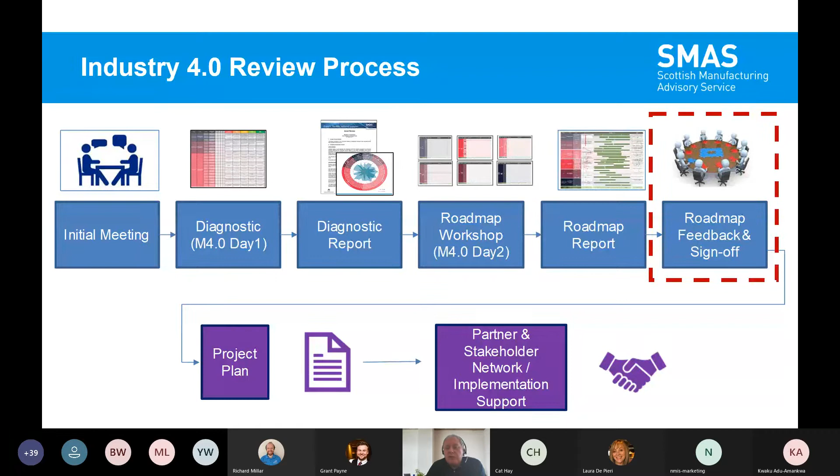So as I say, day 1 diagnostic, day 2 road mapping session, and ultimately we get to the end of that process. We'll follow up with you a couple of weeks later, quickly review the roadmap and have some kind of agreement in terms of what comes next and what the actions are. Those actions can be company specific that they'll take on themselves, or it can be through partners and networks.

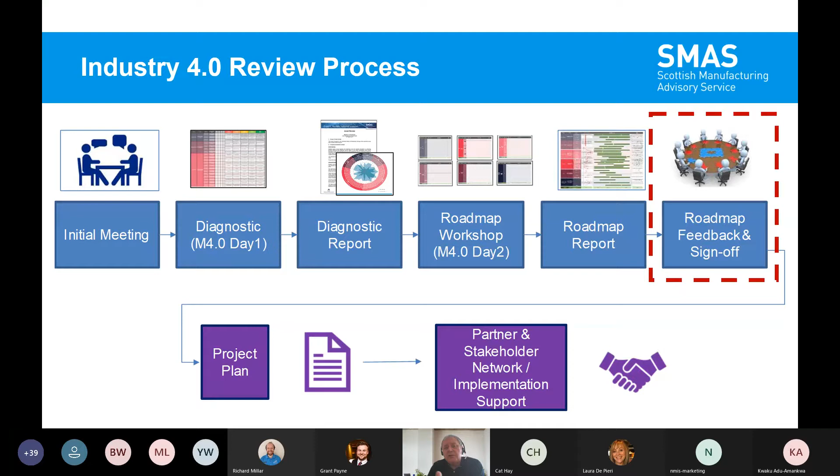Having been involved in a good number of these - SMAS has done in the region of about 200 now as a minimum - we feel companies will have a better understanding of how Industry 4 technologies can impact their business. It also helps dispel some of the myths around Industry 4, like it's really expensive, or it's overcomplicated, and you must deploy everything. I think that's one of the benefits of undertaking this process - it really puts some of these to bed, that that's not necessarily the case.

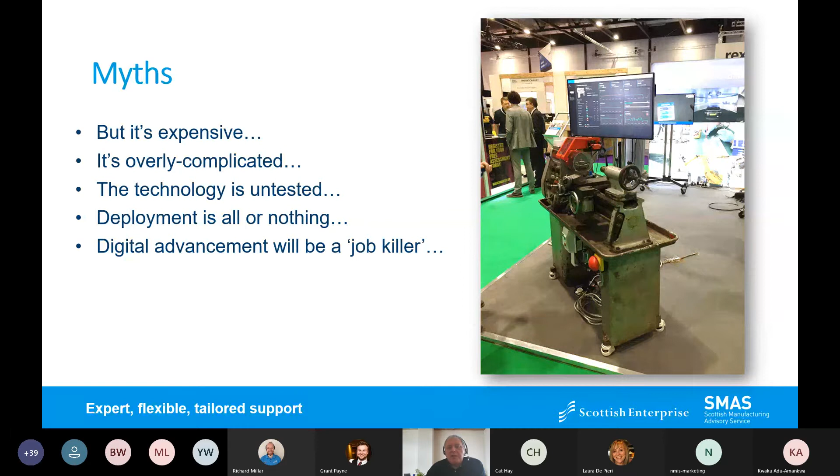It might be SMAS coming back in for maybe an introduction to lean or some SMED changeover reduction. It might be our digital transformations team coming back in to give you some impartial advisory support on implementing, say, ERP systems, or finding out more about best practice happening in the marketplace. We may signpost you towards some of our partners in Scottish Enterprise, such as sustainability or workplace innovation.

But certainly more and more, we are seeing a real drive towards some of our external partners in the Industry 4 arena, such as Data Lab, NMIS, who are on the call today, and CENSIS, for example, with sensors and imaging. And I think it's an exciting time for Scotland, for companies looking to embark on their digital journey.

And as I've tried to highlight there, folks, for me, it's not just about the technology itself, but it's a range of support. And that can be skills and education, it can be infrastructure or collaboration on research, or in many cases, it can be funding through innovation and such like.

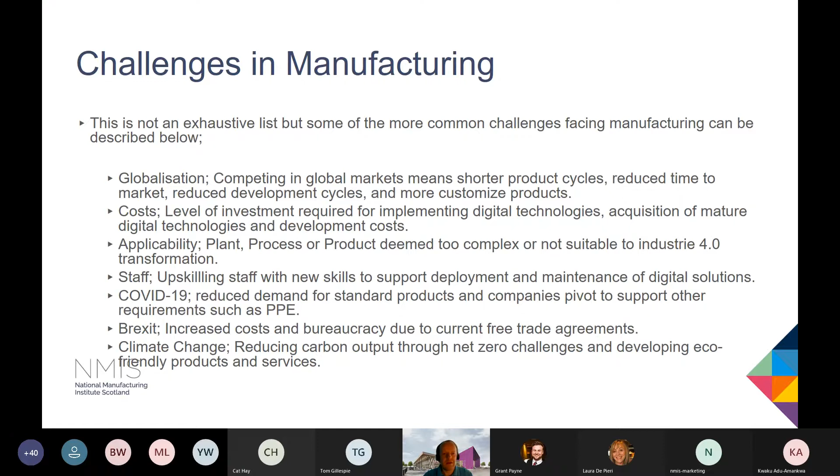Industry 4, also known as a cyber-physical system? It's the fusion of virtual, digital, and physical worlds. A cyber-physical system, which is something that is underpinning of Industry 4 themes, is about how do we manage and maintain a system through a network of connected devices that is able to continuously operate by adapting

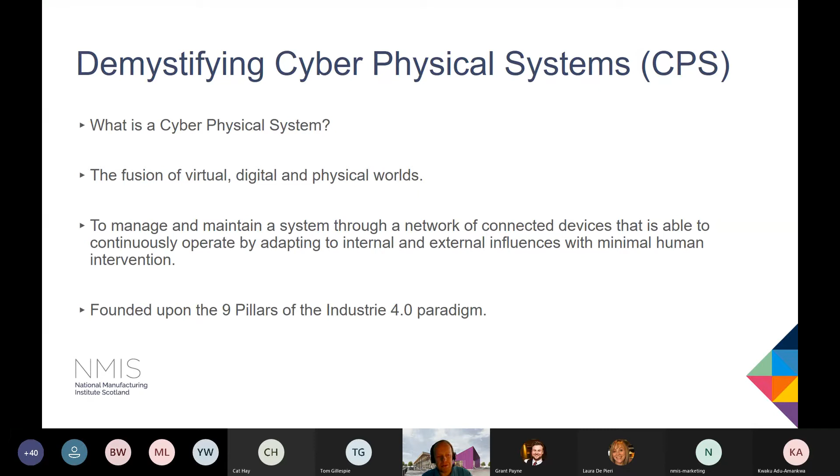to internal and external influences with minimal human intervention. And this kind of theory came out of Germany back in 2009, and it really kind of founded the 9 pillars of Industry 4, as it were.

We're starting to develop architectural solutions around building information modelling. There's some new concepts coming out through product design called model-based definition and model-based enterprise, and how we can apply those digital characteristics from a model into the manufacturing process.

We have control systems, so control systems that operate automated machinery already. So when we saw in the advent of Industry 3 with more automation and robotics being implemented into industry, that we are controlling these systems through PLCs and SCADA systems, for example.

And then what we're doing is we're creating all this already. This already exists, and we're creating and we're managing it through product lifecycle management tool sets, product data management tool sets. We're controlling the business through enterprise resource planning.

So what can we do with that adds a little bit more content to Industry 4? So we can create digital standard operating procedures from the base, the original design intent.

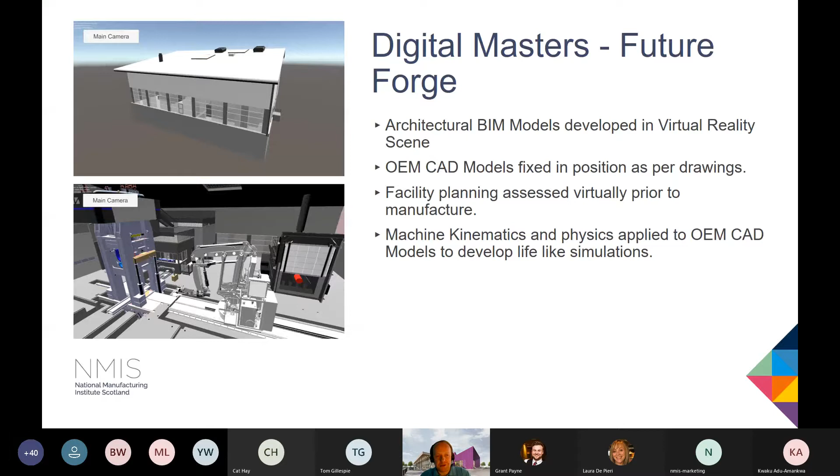The next phase we've just completed is looking at the machine kinematics and the physics of those machines based on materials, weights, etc., and the operations of the equipment, really looking at how we could provide a lifelike simulation into that facility to give much greater context to the person working in there within that VR content.

We can see we've got different views within the VR scene where training and operation requirements are being done. We're starting to train based on what the commissioned system actually looks like now, using a method of hardware in the loop, where we connect the physical joystick that's going to be in the control center for the trainer to operate the robotic arm in the VR cave that we have. So we're really trying to integrate physical hardware into a virtual scene to enable that training and development.

That's where we are with the Future Forge. The expectation is that it's going to finish commissioning at the tail end of this year, with first operational trials going live next year. Obviously COVID's had a bit of an impact on the actual development, implementation and commissioning of the system.

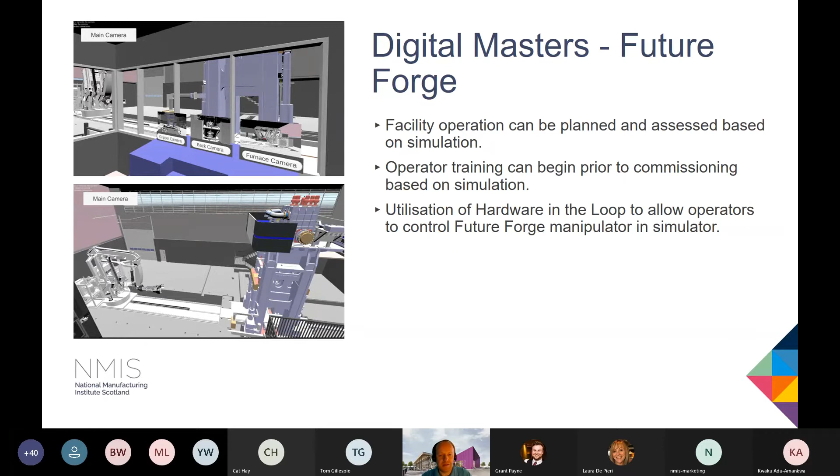The challenge was to look at how we could remove inconsistent filling processes. We had to make sure we were removing overspill, underfill and foaming by looking at real-time data on the fill volume and also looking at how the process works in much more depth. I'm just going to show you the next slide in a bit more detail on that.

So the key requirements: accurate and repeatable fill. We want to minimize the air pocket at the top of the barrel. No overfill - obviously overfill is a big issue with tax requirements for filling whisky into the barrels. No flexible hoses were to be utilised at all, and it had to be easy to use. The target fill time for an ASB barrel, an American Standard barrel of about 200 litres, is 60 seconds, and it had to be suitable for an ATEX environment.

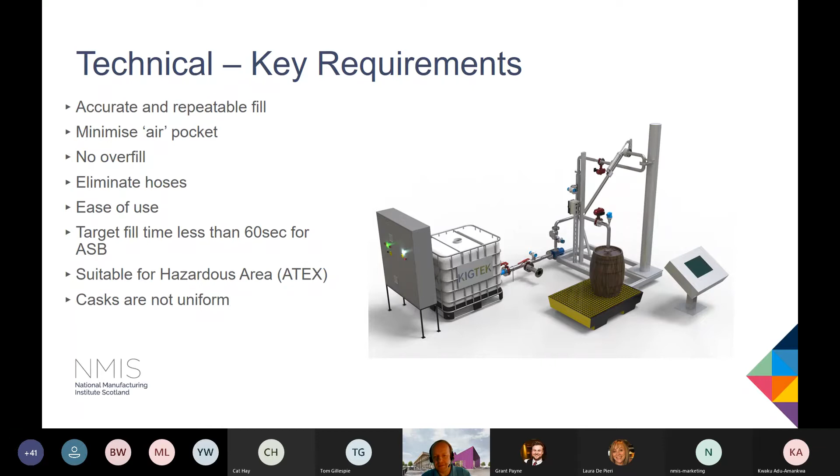The other thing that's really important to add here is that the casks are not uniform. Every cask is stripped down, rebuilt, charred - it's all handmade. Any new cask that's provided doesn't come as a cask; it comes as separate individual components, then it's assembled within the cooperage. So every volume inside that barrel is inherently different. What we wanted to do within this project was look at how we could remove that inconsistency within the process. You can see on the right-hand side here what our final product design, the test rig we built within our factory, looks like.

Well, on the left-hand side, we have the physical world. What is the actual machine, as it were? What is the test rig? What is the production system?

So we start at the bottom with the plant or machine. We have actuators and sensors that can control the process and the physical devices. We have remote I/O servers and control devices that connect to our physical assets and actuators and sensors to control the process. And then that remote I/O layer goes back into the automation system, which is the PLC. And the PLC is operated by the operating system, which is PCS7. And then what we're doing is we're sending all the data into the cloud, into a database to record all that.

But in our digital world, we can see we've got some different elements in here. So at the bottom, we're really looking at how we simulate the plant behavior. So we used a package called AMESIM, which helped us to understand the hydraulic flow of the fluid going through the actual mechanical design of the physical test rig.

So we're using that to understand quite exactly, with regards to the pipe runs and pipe bends, what the fluid process is doing, i.e. what the speed is, what the pressure is, what the pressure drop is across the control valves and the flow control valves. So we really are getting an in-depth knowledge of the process before we even started doing anything.

And then we're using a sort of integrated package here that allows us to connect the CFD, the hydraulic analysis, into a platform called SIMIT, which is a simulation of the drives and the signals that the actuators and the sensors will look at within the physical system. So what we really are creating here is a digital entity of our physical assets that control the process.

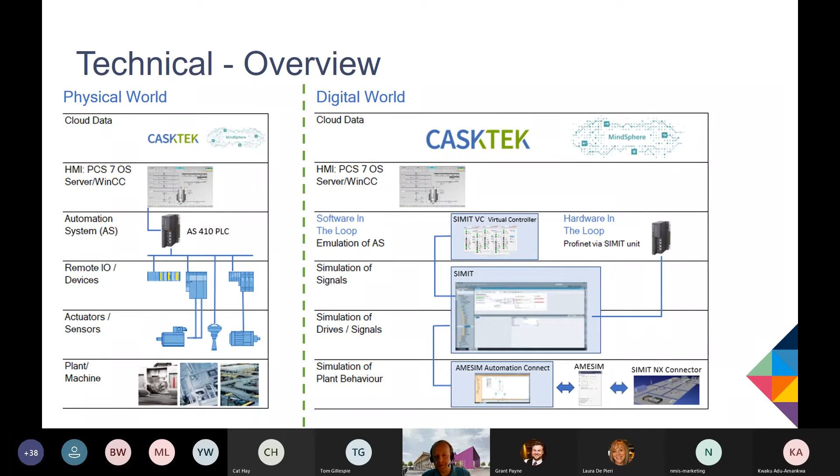The results from that process, we were able to achieve a 5% improvement on industry standards with better than 99% fill on a 200 litre cask. We reduced the cask fill cycle time by 33%. So we went from approximately 60 seconds down to 40 seconds. There was no underfilling, there was no overfilling. So it was a highly repeatable, highly accurate process. And the impact of that is that there's potential to save the whisky industry millions of pounds each year in logistics, warehousing and inventory costs.

When you think about a 5% improvement on industry standards, so we're going from 94% to 99%, that works out about 12 litres per cask. When you have approximately 8 million casks across the site of a big plant like Diageo, you're looking at about 96 million litres of whisky. And the other major impact we have is we've provided a new product and service offering for Kigtek, the SME. They've now got a solution that allows them to challenge other industry areas that they've not had the exposure to already.

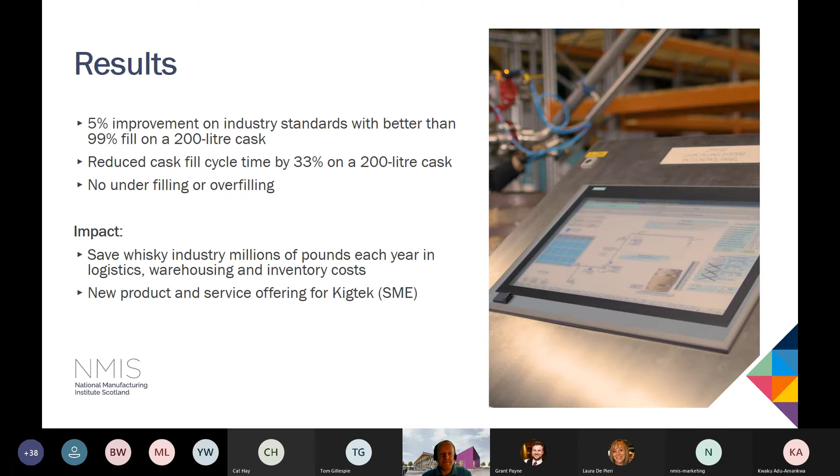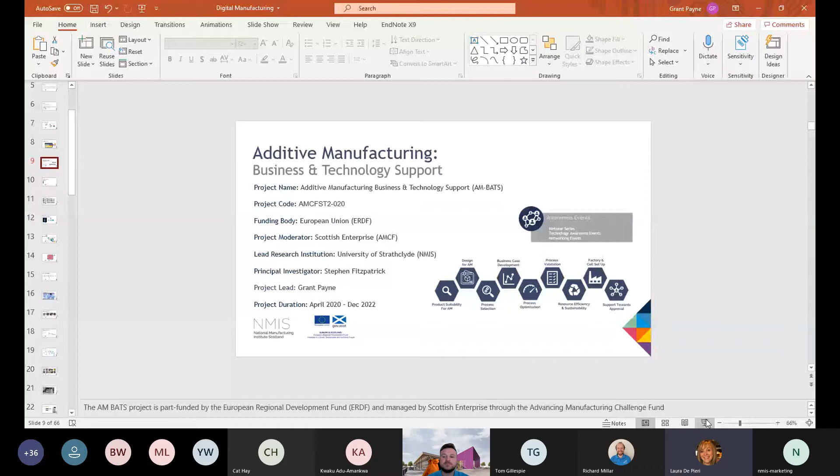Sorry, apologies about that. Thank you very much, Laura, for bringing that to my attention. Yes, so Stephen Fitzpatrick, who unfortunately can't be here today, is principal investigator on that, and I'm the project lead, and this project's running until December 2022.

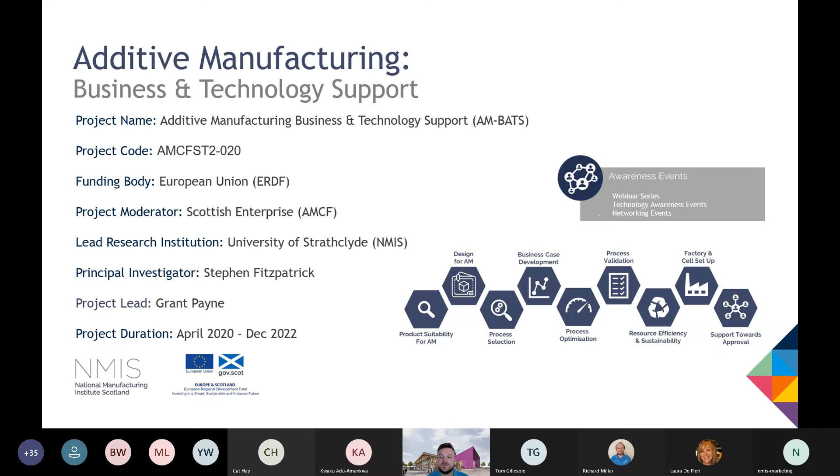So the project is aimed at SMEs located in Scotland. So we have three criteria: located in Scotland, SME, and the adherence to horizontal themes. And if you follow this little web link here, you can find out more information about that.

Just briefly looking at what we are offering within this project, there's a number of different support packages ranging from product suitability through to factory cell setup and process validation. But these are just a kind of overview to show you an idea of some of the things that we can help you with. But if you've got some challenges with additive manufacturing, my contact details will be there at the end, and please get in touch and we can discuss how we could work together.

So how are we applying this in additive manufacturing, the use of Industry 4.0? So just very simply looking at a kind of standard manufacturing process, going from design to manufacture to use. We're drawing down on a database of information to inform how each of these steps happen. And this is very traditional and how we've been working for many years.

But as Richard went into great detail explaining there about feedback, what we're now looking at is the information coming out the back end of design, so FE simulations, manufacturing, so process monitoring, and use, again, monitoring systems when parts and products are being used. And then we use this for continuous improvement as a feedback loop.

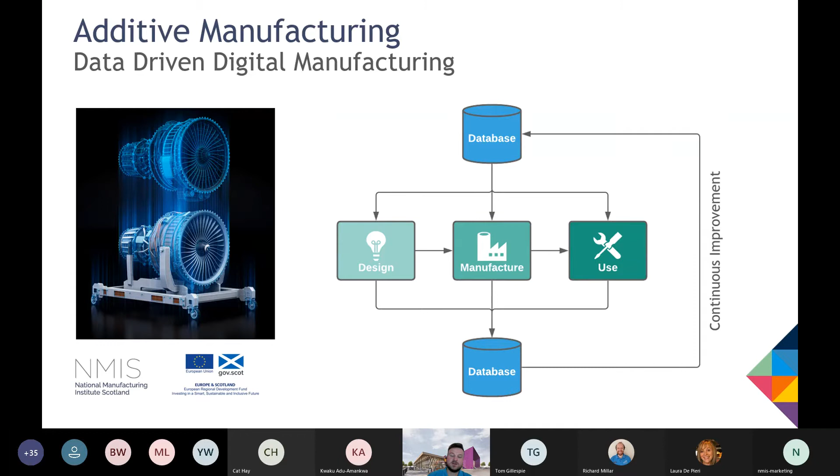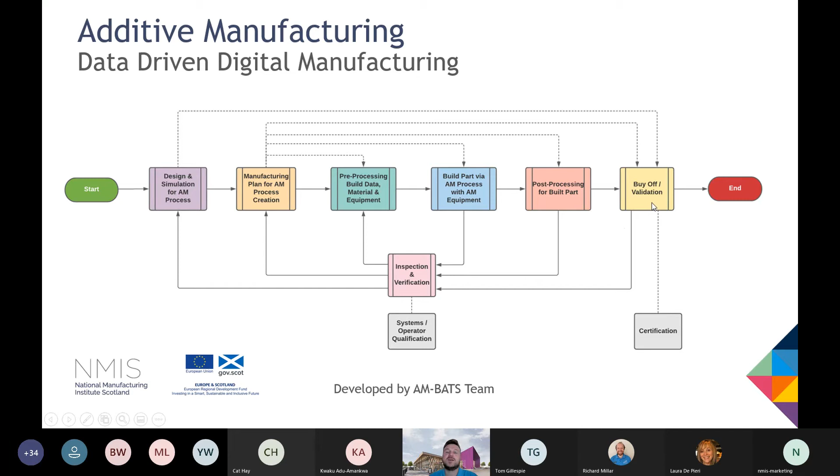When we're looking at the additive manufacturing process, we've categorized it into these six main components: design and simulation, manufacturing planning, pre-processing, the actual manufacture itself, post-processing, and then buy-off and validation. Now you can see that we've got a loop system going on here in terms of inspection and verification, and you can imagine that all the data generated from this then leads up into how you get parts certified at the far end of the scale.

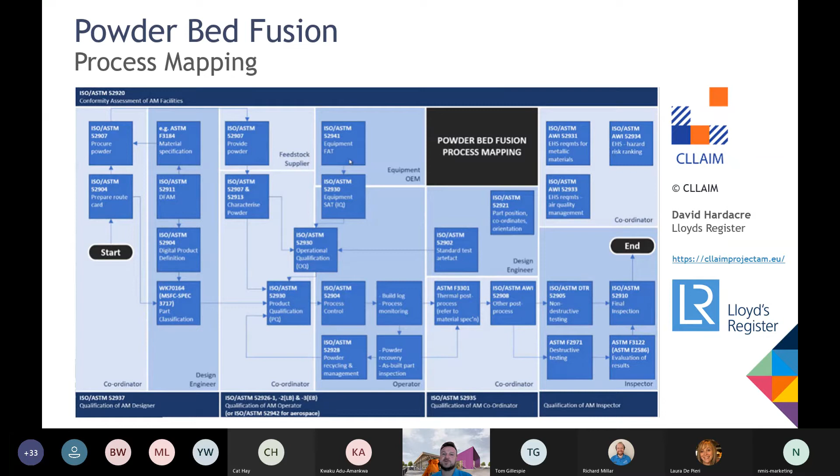David Hardacre from Lloyd's Register has done a really good diagram to summarize this as part of the CLLAIM project, looking at powder bed fusion process mapping. You can see various different points along the way where all this data is being created, such as powder characterization—the material that you're pulling into the system—process monitoring, and all your destructive and non-destructive testing. Once pulled together, this is the pathway for having these parts certified, because without this data, it's impossible to have these parts certified—you don't have the information to do that.

So I'm going to do a quick case study here, looking at a project we worked on called DigiTool a couple of years ago, just looking at that process we're talking about—from design to manufacture to being used to its end of life.

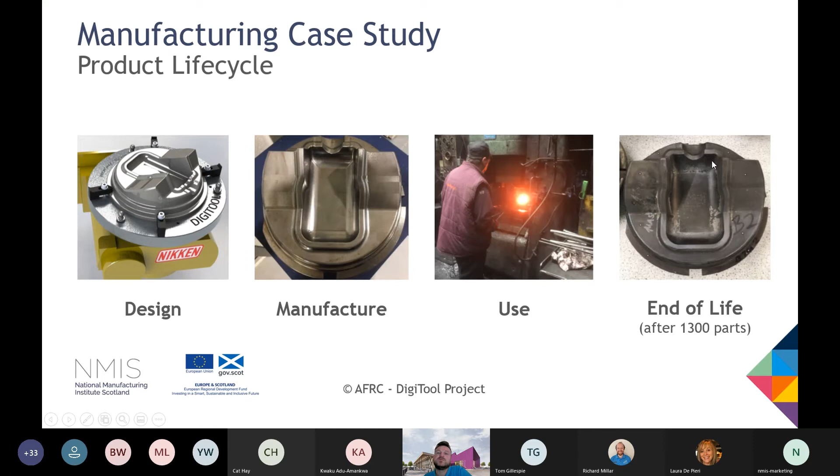This was a closed die hot forging tool, and you can see that after 1,300 parts, the die had worn to such a point that it was now no longer conforming, so it had met its end of life. Looking at some of the basic information coming out the back end of that—what we've learned or what we knew—is that we knew what the tool material was, we knew what the process was, we now knew the amount of parts before its end of life, what the failure mode was from looking at analysis, and also we know what the lead time was for the part being manufactured.

So if you look at this in a very simple way: from the start of operating, you need to work back the way to order your dies or tools so they're there in time. But to ensure continuous operation, you then need to think about when you'd need to order your die to have it there for continuous operation. So very simply, just looking at what the lead time was minus the life expectancy, and then putting a small buffer in there.

So this is where you can start to take on board a lot of what Richard was discussing in terms of all the data that's being driven. If we had an automated system for ordering your tools, you could get that level of operational certainty if you're working with complex supply chains, which are being made even more difficult by Brexit. Now you can start to imagine if this system becomes even more complex, because this is a really simple, basic one that I've put here. How do you actually make sure you have everything you need at the correct time? A lot of this can be helped and assisted by process monitoring.

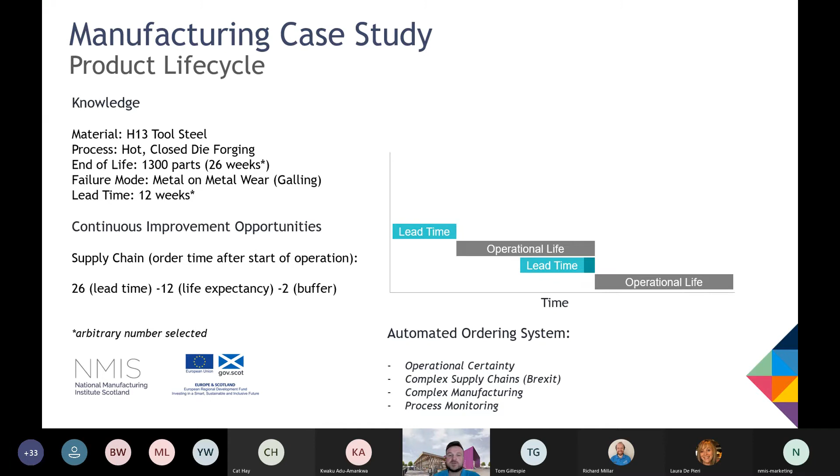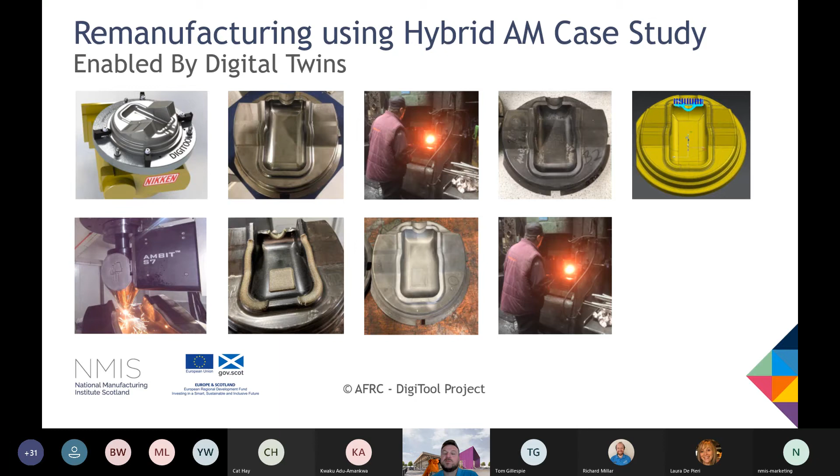And then that's what that looks like. Using, again, the original CAD data, we machined back to a conforming geometry, and then we were able to enter this back into service life. So this is how that goes back through that loop I showed you earlier on of retaining assets. Obviously at some point that will wear down.

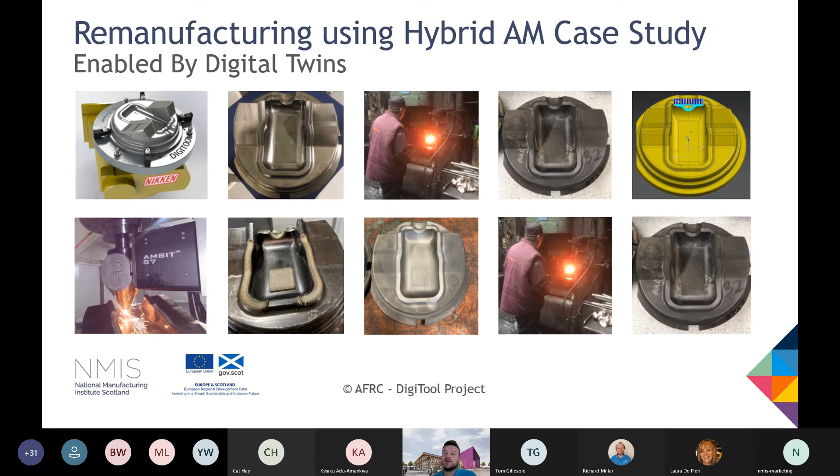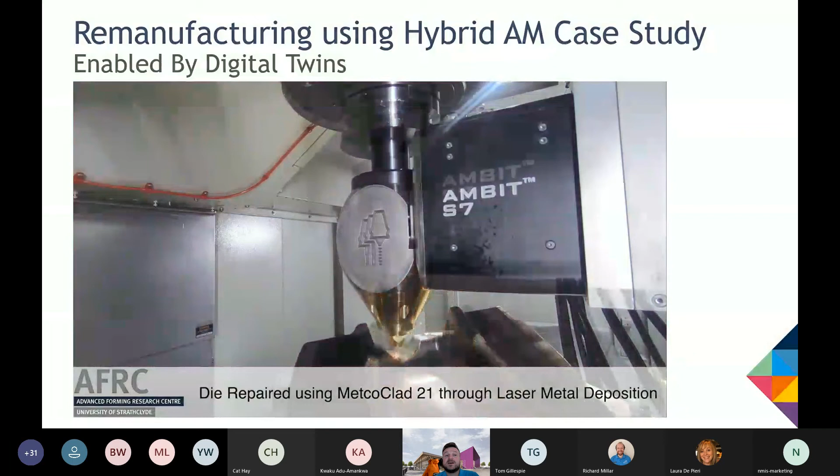I've got a little video here just showing you that exact process, because I'm sure it'll be of interest to some people here. So like I say, we machined that down first of all, and then what we did was we applied, interestingly, a different, more hard wearing material in the areas of wear, as you can see there. There were a few different parts where it was worn, so we remanufactured those areas.

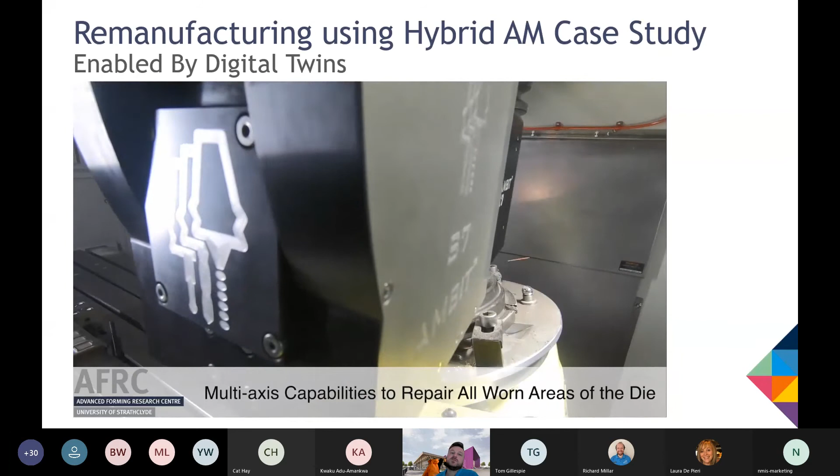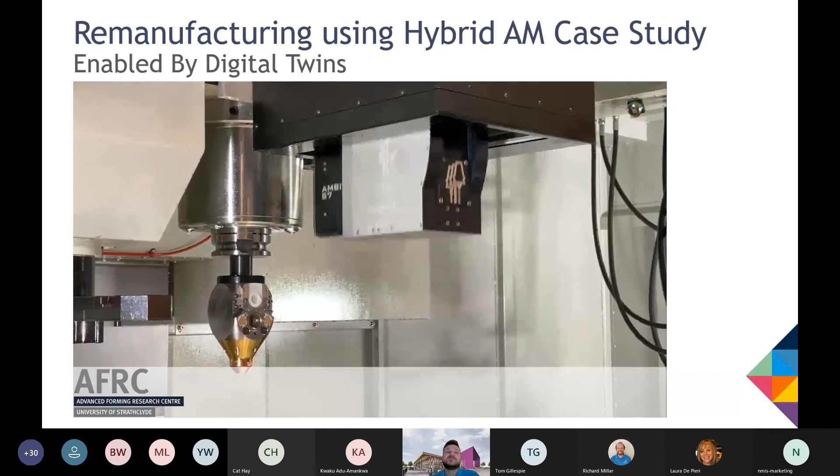And then we should see at the end here, once this part's finished... oh, okay, this video is just the additive, apologies. But then after that, we remachined it.

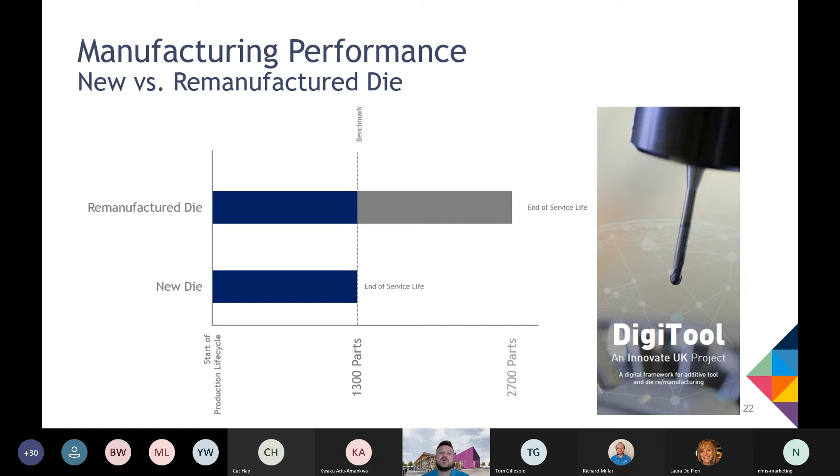So what does this kind of look like? We knew that the original die would manufacture 1,300 components before it met the end of its service life. So that served as a benchmark for what we were doing. We could then pull the other dies out of service after 1,300 components and remanufacture them. What we found when we put this back into service was that we were able to manufacture an extra 1,400 parts, which extended the service life of the die by 108%.